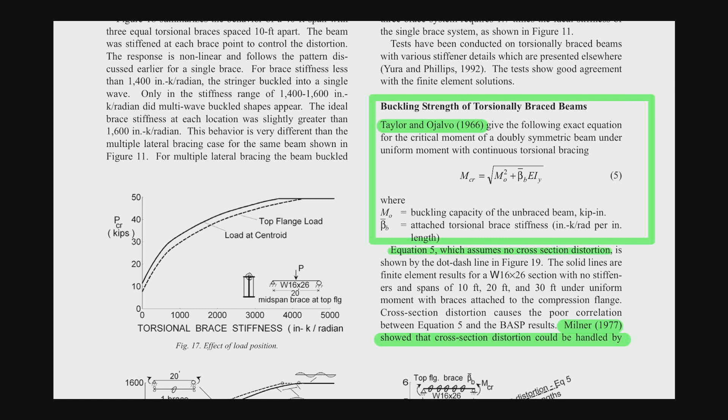So we are going to come back to where we left off yesterday, and we stopped somewhere before the torsional bracing. So the torsional bracing is another part of beam bracing. As the beam fails by stability, it fails by lateral torsional buckling, and that means your brace can be the lateral brace, but you also need the torsional brace to suppress the torsion mode.

The lateral part was already discussed, and we know very well that the lateral brace helps the compression flange such that it mobilizes the full compression force, and that enables the beam to mobilize the full moment as you wish. So the lateral brace is attached to the compression flange. If you put the brace at the wrong point, then it is useless. That's the key requirement for the lateral brace.

Now we are going to talk about the torsional brace. I might look into this information and bring it to you all next year, or if by chance I get to it a little bit later, you might be able to watch it soon. But it's up to the schedule—worst case it'll be next year, and this is the beauty of online teaching.

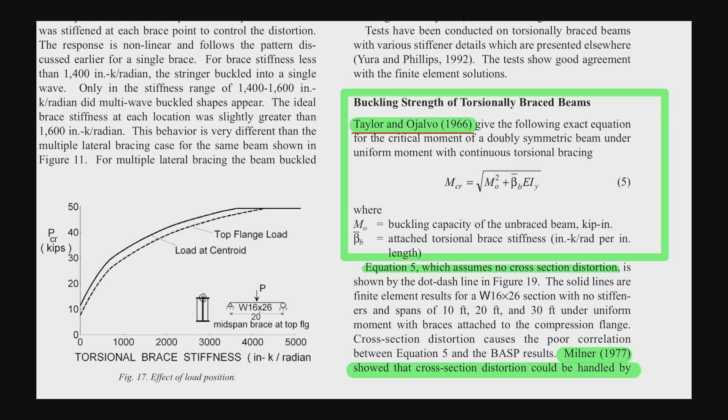So a point like this could be picked up—I think it should be very interesting to pick up. I think you guys signed up for higher education, master's education, because you want to learn. You may not just want to pass the examination. Learning is supposed to be lifelong, and probably you'll have the interest to come back and see why this is usable, why it's good enough. Anyhow...

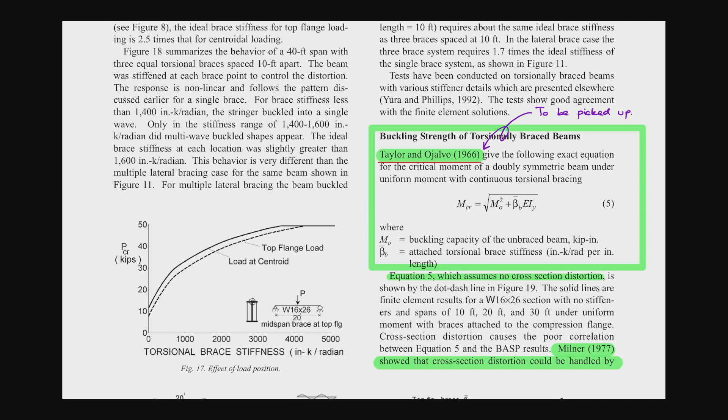The equation of the critical moment that incorporates the brace—this time not the lateral brace but the torsional brace—is given here, and you have M naught, which adds up with this part. M naught comes from the section that is not braced. So you have the section, and from the derivation, you recall that without a brace along the span, and with a uniform moment acting on the beam, you allow the lateral torsional buckling to occur.

So you're going to expect the CB and the other things coming back in later. This part here is enhanced by the term representing the torsional bracing. This torsional brace stiffness comes along with EIY. IY is the lateral bending stiffness of the beam—of the girder—not the major axis, but the minor axis stiffness. So it's the first part, enhanced by the brace part.

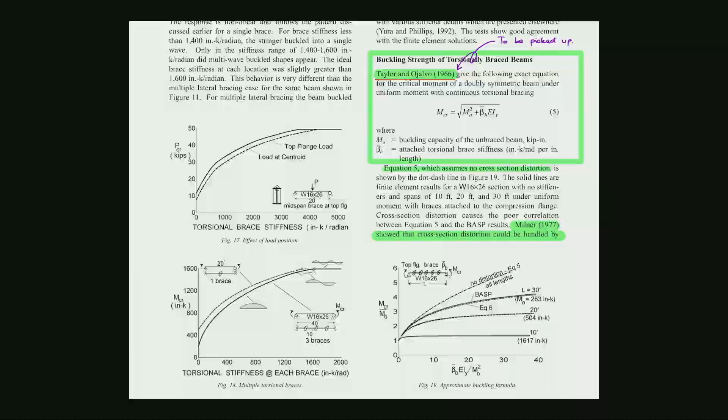And well, the study has been conducted. By the way, this beta B is given by the uniform rotational spring applied along the beam. It is not just going on at a particular point. This is just a simplification, because it is already difficult enough to end up with the M naught that we require. We use the assumption that the moment is uniform, whereas in reality it is not, and then we have the CB factor. Likewise, when you apply the rotational spring, this spring is simplified.

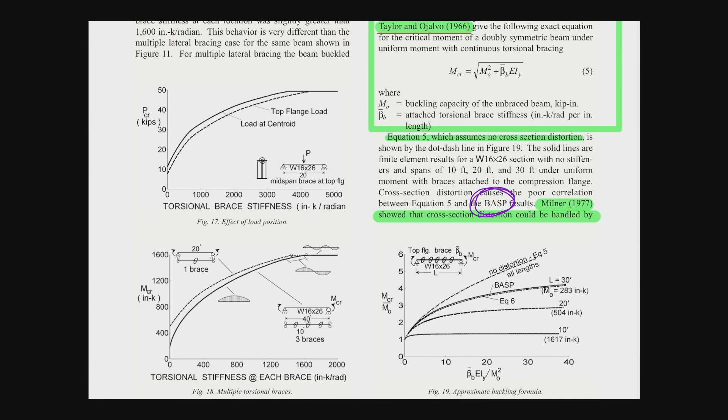It is just distributed along the length of the beam. The analysis by the finite element is given by BASP here. Actually, Yura talks about BASP somewhere - I'm not sure if it's in this paper, but it was supposed to be. He talks about BASP, a finite element software that incorporates the buckling, as the beam is constructed from the shell.

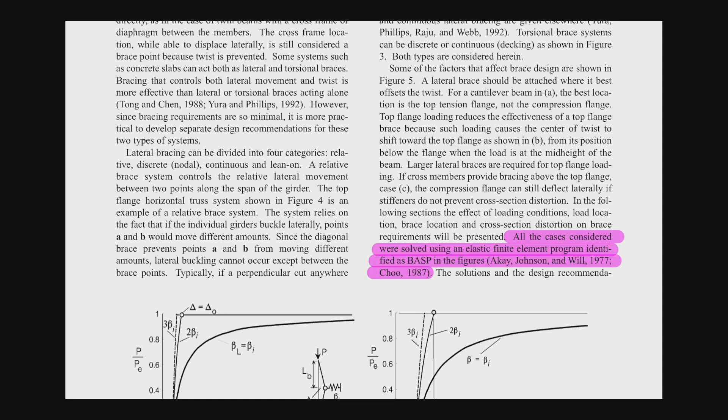All cases considered were solved using an elastic finite element program, identified as BASP in the figures. These should be the group of people who developed the program. The solution and design recommendations presented are consistent with the work of Kirby and Nethercutt. So BASP is the program, but what I want to emphasize is that the buckling analysis was carried out by BASP - that's why you can get this point, this line, these results we have.

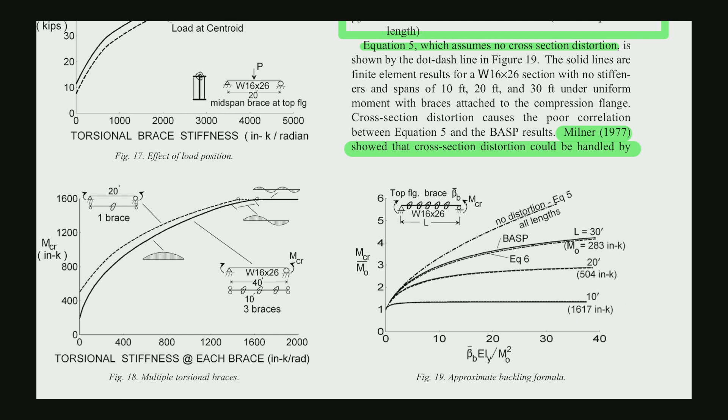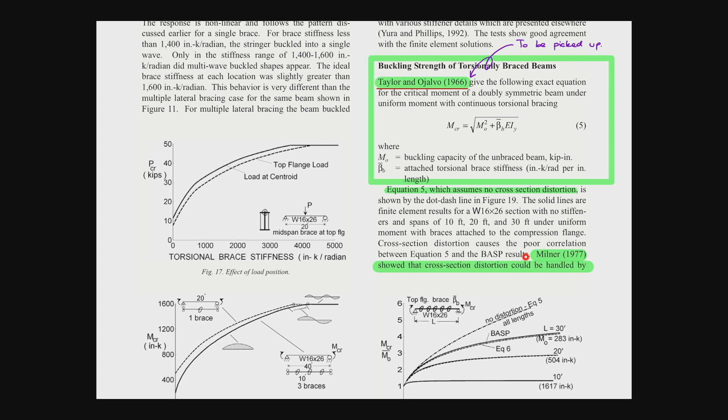So first of all, let's see a bit about the explanation. The dash shown by the dot-dash line in figure 19 is this one. The solid lines are finite element results with no stiffener, at different spans. Under uniform moment with brace attached to the compression flange, cross-section distortion causes poor correlation between BASP and equation number 5.

So over here, BASP - the equation 5 is the equation above - cannot account for the distortion. So what is this cross-sectional distortion?

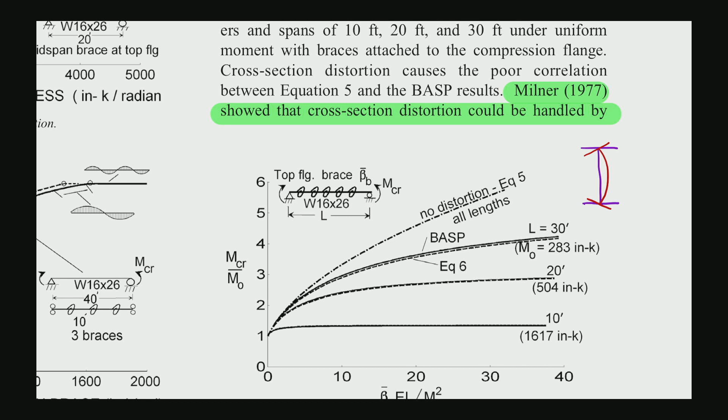Well, the point of this graph is to address the need for a stiffener that prevents distortion. Actually, stiffeners are used on many occasions. First, when the beam buckles from lateral torsional buckling, the beam turns into this red shape - the distorted shape.

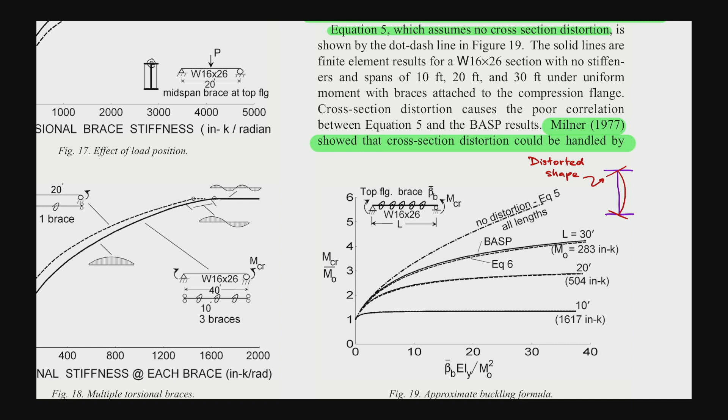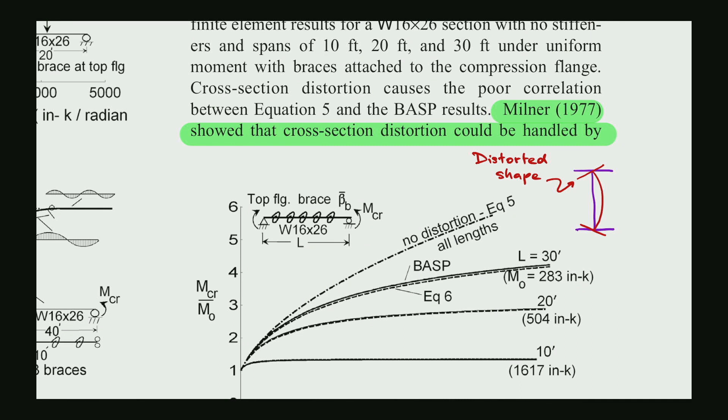So you can expect there will be a twisting force, a twisting moment, that's going to cause the cross section - under the bracing condition - to end up with some distortion. The cross section is deformable, and without the stiffener you end up with this. The equation above simply cannot account for this distortion, because this localized behavior varies along the length. So since the closed form solution doesn't incorporate this fact, equation 5 is greater than the analysis carried out by the finite element software, and that's equation number 6. Equation 6 is going to incorporate the distortion, but without it, this is true for all lengths - it's very far off there, less far here.

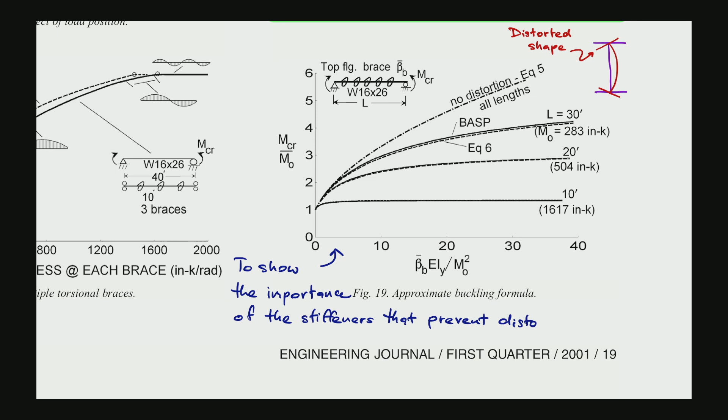Let me just note this down - this is to show the importance of the stiffener that prevents distortion.

So next, the torsional stiffness and the spring stiffness - the brace stiffness used against torsion - is going to be examined. Basically, when we look at the system of the beam, the brace, and the torsional brace, you have many elements like a spring system. Let me explain it this way: it's like a spring system connecting together. For example, you have the brace, the part which is the diaphragm.

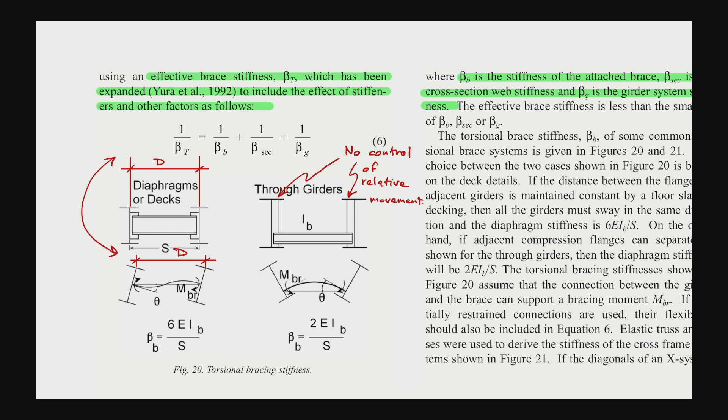Sometimes we call it the diaphragm, and this part has its own stiffness. The girder itself has its own stiffness in bending - the girder can be bent about the axis coming out of plane, so the bend shape is going to look pretty much like this. This part also contributes to the torsional stiffness of the overall system. The cross sections, the brace itself, and the girder effect are all going to be there. So as you have so many springs, these are attached like...

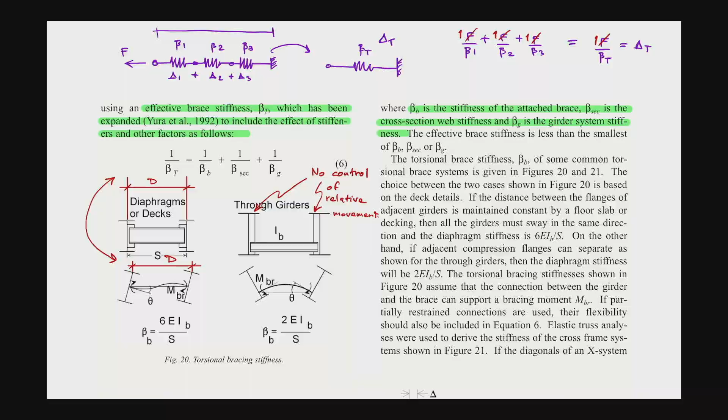So if you have a system like this, and you want to find the equivalent spring stiffness, if the springs are attached in a parallel configuration like this, then you sum them up. But it's different here—it's put in order like this. So you get this total stiffness first, computed from here.

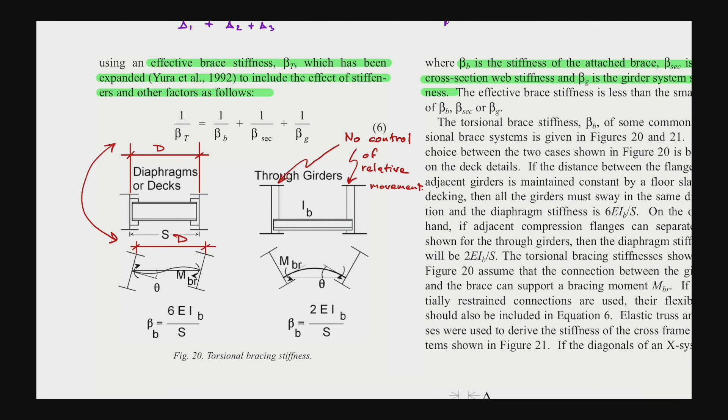So let's talk about beta B, this part here first. This is the brace contribution—the contribution from the brace itself. So the brace stiffness, how is it calculated?

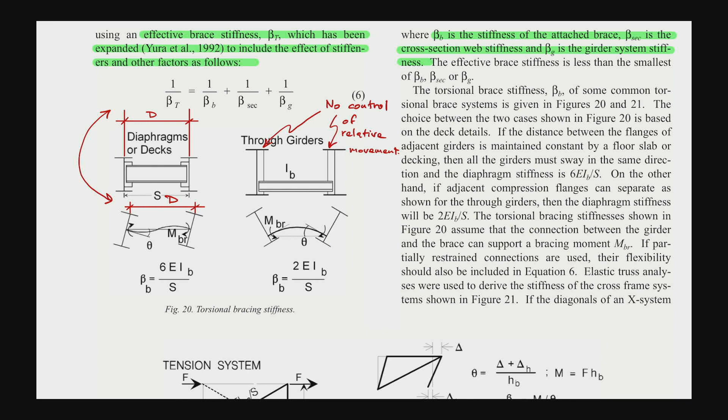As it is the brace against rotation, basically it is the moment divided by the angle of twist, or the theta angle of twist in radians, which is something like this. So you have the moment part and the angle of twist. It's a simple way to find the stiffness, but Yura has prepared sets of formulas for calculating the stiffness of each kind. For example, the first kind, if you are dealing with the girder...

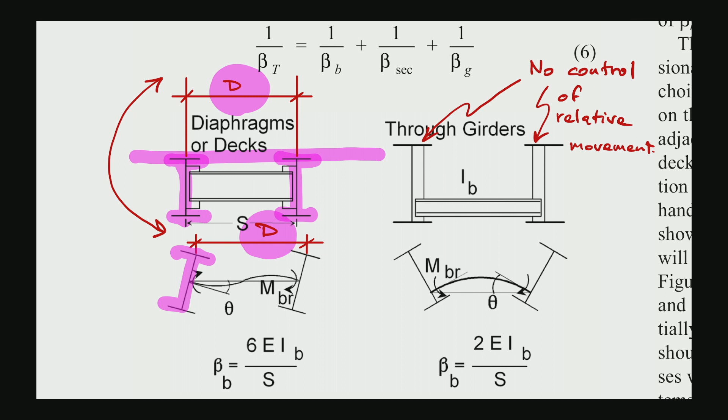These two girders are under the deck—the concrete deck or steel deck or something that connects the top flange of the girders together. At construction, the distance between two girders is D, and when the girder deflects, the distance D is going to be maintained, because the diaphragm connects and locks, preventing the two top flanges from moving away from each other independently. They must move together.

Right, so that's one system, and with that restraining effect from the diaphragm, you end up with this double curvature shape of the brace. This brace is made of just the steel beam, connected by a plate between two webs. Now if the torsional brace is given by the beam as well, but it's a different situation...

This is the through girder situation. So what is this through girder? These are situations you can actually Google, but to make it quick for this course: you might see many bridges made of steel girder, with a platform for the traffic. Generally this is used for rail, the railway system. So the train is going to run on the rail, and this is the platform that carries the load. This is called the through girder system.

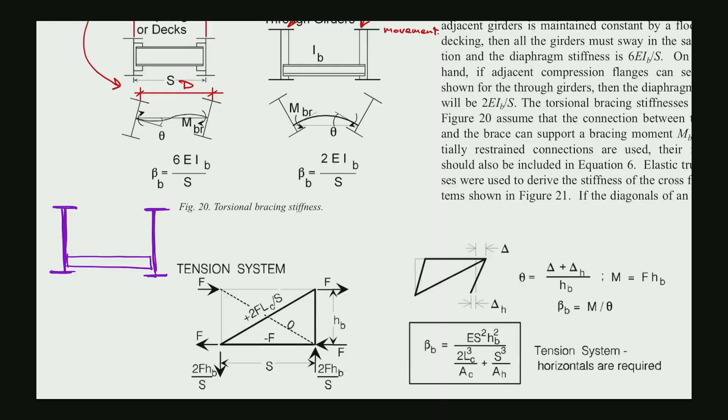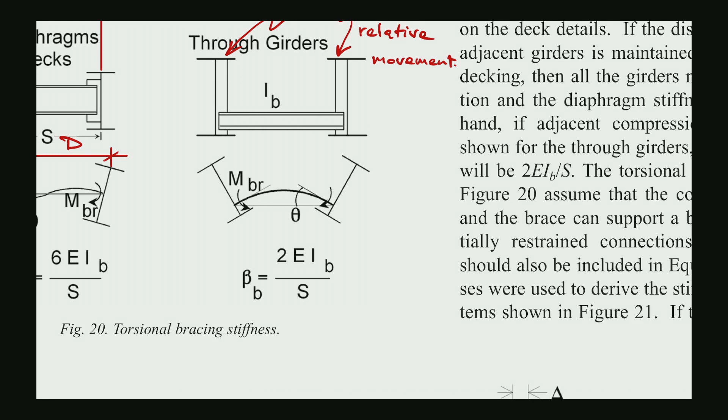It's used like the side barrier. So for this configuration, since you don't have any restraining or displacement control that controls the relative displacement between two top flanges, you end up with this shape. It's going to form only single curvature, and single curvature is easier to form than double curvature, and that makes the stiffness of the brace lower than the other case where double curvature could form. So that makes about 3 times difference in the stiffness.

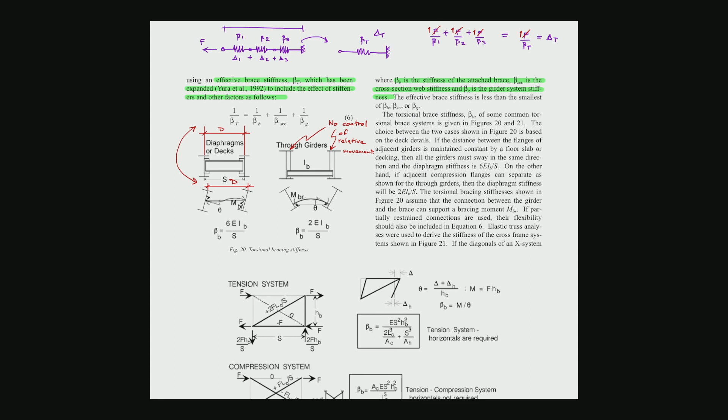This is for some situations. The above is the situation where you have the girder as the rotational or torsional brace, but in many situations you have something called a diaphragm. This diaphragm is somewhere here, and this is your girder - actually it's not going to be that high - and you have the diaphragm.

If you commute around Bangkok area, or whichever area, when you're under the flyover, and if the flyover is a steel structure, a steel bridge, you're gonna see the steel girder, and generally you're gonna see the diaphragm at a few locations like this. So this is a girder, and this is a diaphragm. The diaphragm locks girders together, and that enhances the capacity and the stability, and you can see many shapes of the diaphragm.

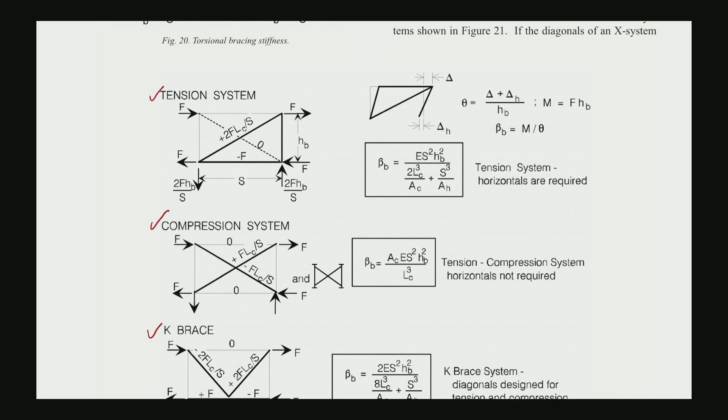So a diaphragm could be the tension system diaphragm, it could be the compression system diaphragm, or the K-brace system. For a tension system, you must have these 3 components - 1, 2, 3. Here is going to be connected to the girder. For a tension system, since the tension element is much stiffer than the compression, the compression element is suspected to buckle.

So we make use of just one in the calculation. In reality, this compression is going to participate, and that will enhance the capacity - it will enhance the stiffness of the torsional brace - but we may not count it in for simplicity. So three members are needed. This one is crucial, it is necessary.

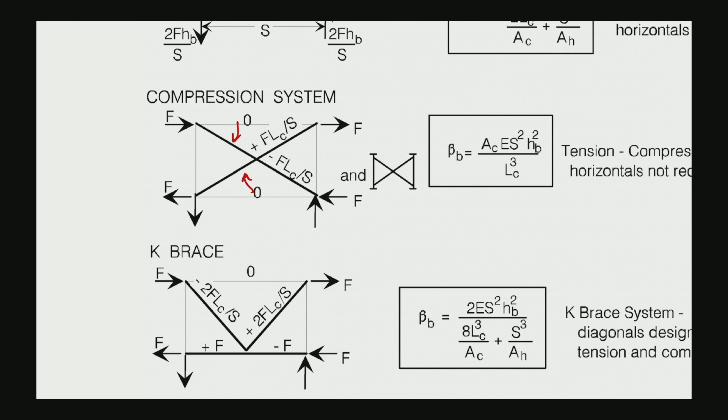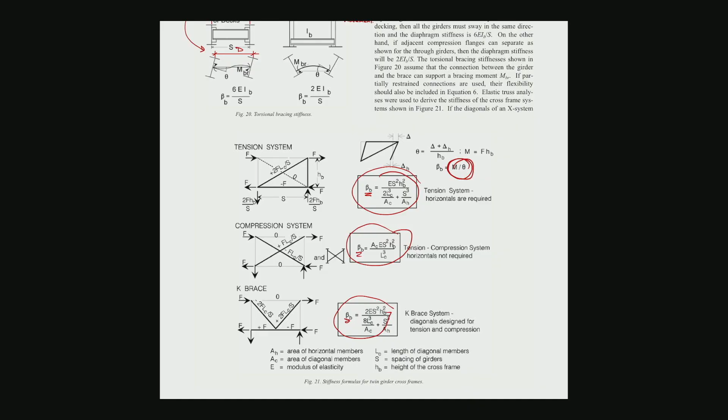Right now we look into this, just the side of the system. You see that beta B is already given. Beta B is the torsional stiffness, rotational stiffness, which is computed from the moment divided by theta. Theta is approximated from here - the lateral displacement that you expect from the calculation, divided by the height of the beam of the girder. This constitutes the angle, the rotation. So you get the moment divided by the angle of rotation, and you get the torsional stiffness of the diaphragm.

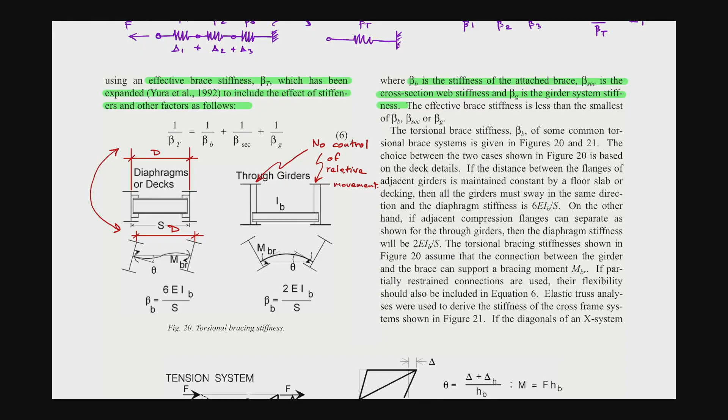Right now we've enlisted 3 parameters with 3 torsional spring stiffnesses. The first one, beta subscript B for the brace, is already covered. Then we have the remaining 2: the deformability of the section that reduces the torsional brace stiffness, and beta G, the girder stiffness, which also participates in the rotational stiffness of the brace.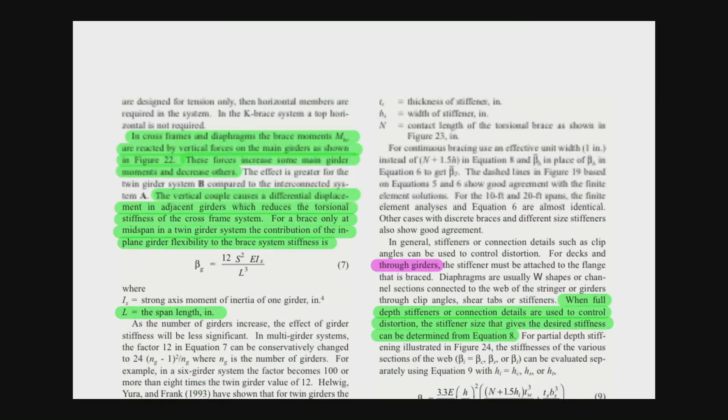Let's see - I'm not sure if I have uploaded this paper or not, but it's not difficult to find. Anyway, I'll put it there if I find that it's not available yet. So this paper talks about the diaphragm, frame, and so on, but I will not read it for you because you can read it back home.

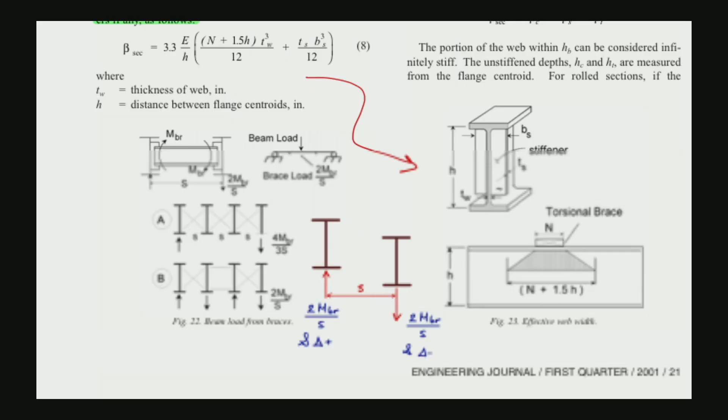The thing is that when you have the two girders connected to each other, and these two brace against the torsion like this, the torsional brace is going to produce the moment, because it restrains your beam against the rotation. So that restraining effect is going to cause the moment - the bracing moment. If you calculate, you will find that there will be something that counteracts with this MBR, the bracing moment.

The MBR will be computed from the beam, computed from the diaphragm. You can compute the MBR quite easily. You get MBR, so total moment is 2 MBR. Now you need to balance, you need to equilibrate the system here, because if you have the moment, you need the counteracting moment, and the counteracting moment is going to be from the resistance of the girder. So this moment is going to cause this pair of force couple - you have 2 MBR, and the force required on the girder itself is going to be 2 MBR divided by S, where S is the spacing between two girders.

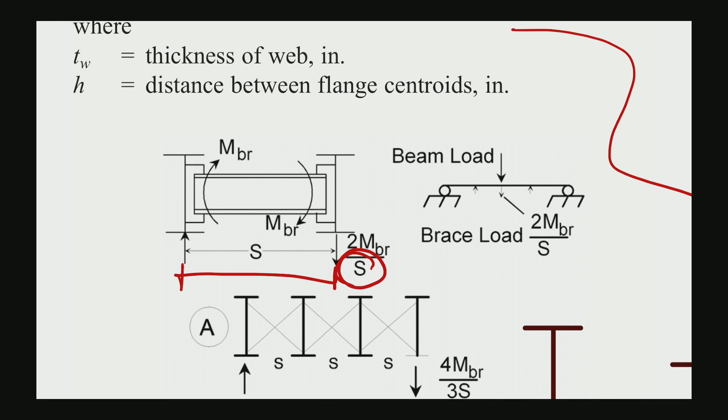The point is that the explanation in the paper here is not so detailed, so I'm going to explain it to you. Here you have the point force acting, which is caused by the brace, the torsional brace - it is 2 MBR over S. Your beam has the stiffness, and that is going to make your beam deform like this. In order to find the deformation here, let's call the deformation delta.

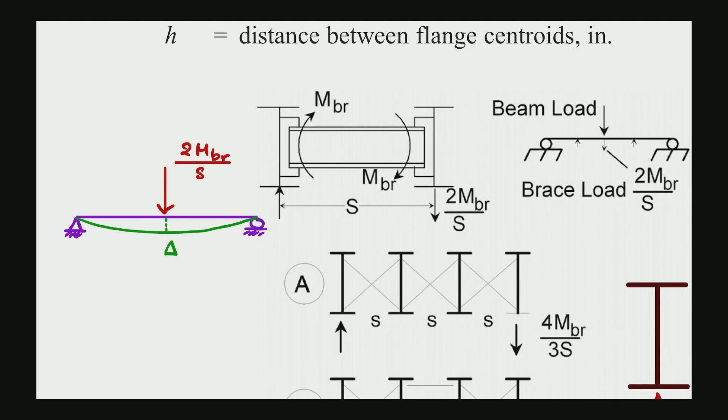If I want to call this one P, just to make it simple first, what is the relationship between this P and the deflection delta? You can just do this on the back of the envelope or just on the scratch pad, right? It is the PL cube over 48 EI, or just Google up.

So the deflection is computed from the force. You have the reactions, and you can get the bending moment diagram. You compute everything accordingly, and then you get the delta equals to PL cube over 48 EI.

Well, the E is simple. We do not need any judgment for the E, because we are talking about steel structure, so it is simple. It is just the E steel. But what about the I? I was supposed to be which I? IX or IY?

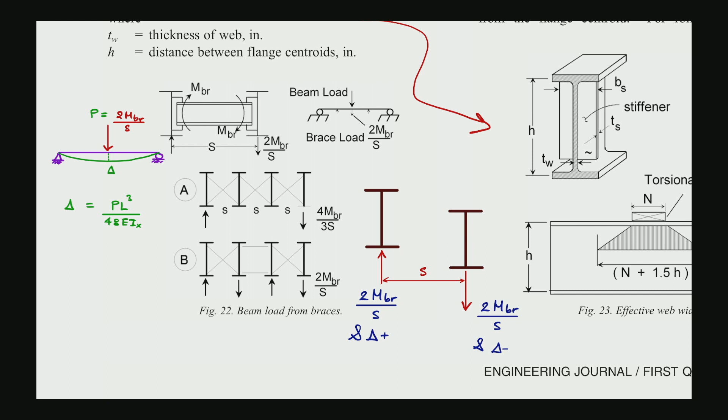This deflection here is controlled by the IX strong axis, right? We are not talking about the lateral, not the horizontal deflection. We are talking about the vertical deflection, and the vertical deflection is controlled by IX. Okay, so just to make sure, because in this course, we deal with lateral deflection and vertical deflections. So you got to stay tuned and make sure that you understand how the mechanism works.

Why the formulation goes this way. All right, so now I have the delta. I will just rewrite the P in terms of delta. So I have the 48 EIX over L cube, and that is multiplied by the delta equals to P. Am I right? Get this move up there, get this move down there. So 48 EI over L cube multiplied by delta equals to P.

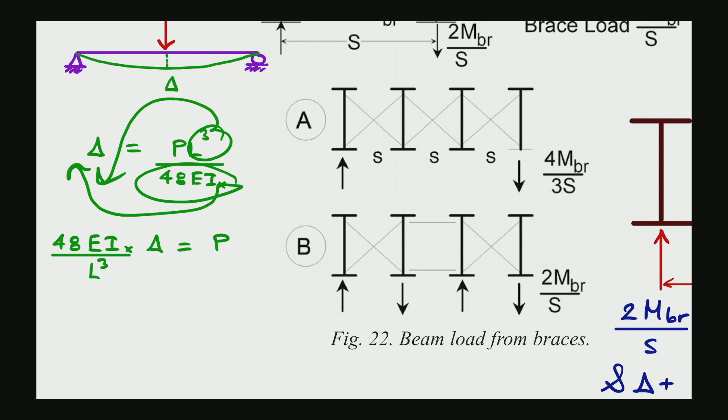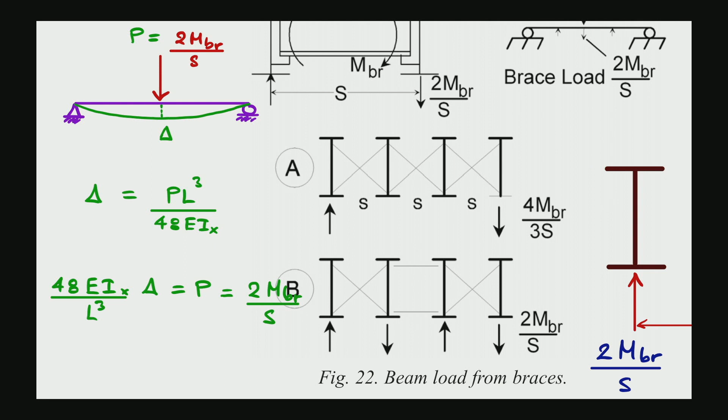The thing is that the P is equals to 2 times of MBR over S. So this is going to be replaced by 2 times, I will say that it is equals to 2 MBR over S, where S is a spacing between two girders.

Now, what next? It is not shown in here, not covered in detail why this formula comes up. Just the explanation that I think it is too difficult many times for people who read. Okay, so I spent some time looking at it, and well, we were gonna see how it ends up at 12 EI S square over L cube.

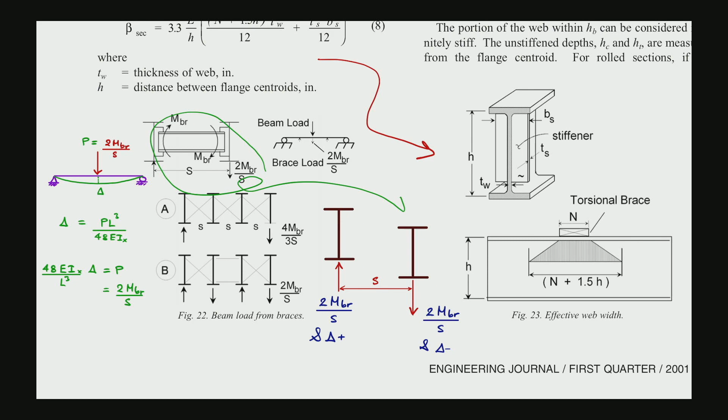Now we come here. This picture, okay, actually it is pretty much like this one, but I redraw it. So the effects from the MBR cause the downward force on one girder and the upward force on another, and that means they are the equal amount of force, as you can see as I wrote it down this way. Same magnitude of force, same magnitude of deflection, but one is the upward deflection and another is the downward deflection.

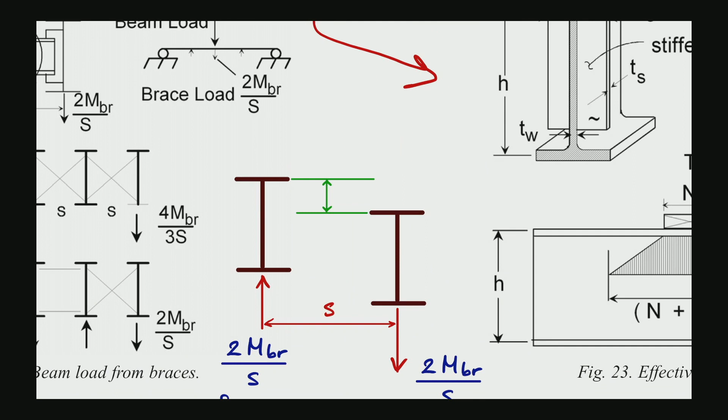So basically, if I want to find the relative deflections between two girders, here is how much? Delta and delta, right? 1 plus 1 minus, so it turns out to be 2 delta. This is the total relative deformation between two.

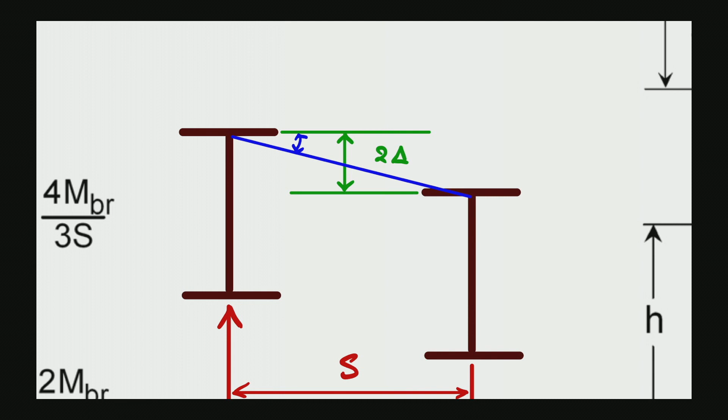Or if you want to get the angle, so the angle could be computed. And this is to be called theta. And theta is computed from, it is a little too small, theta is computed from 2 delta, right, divided by the S.

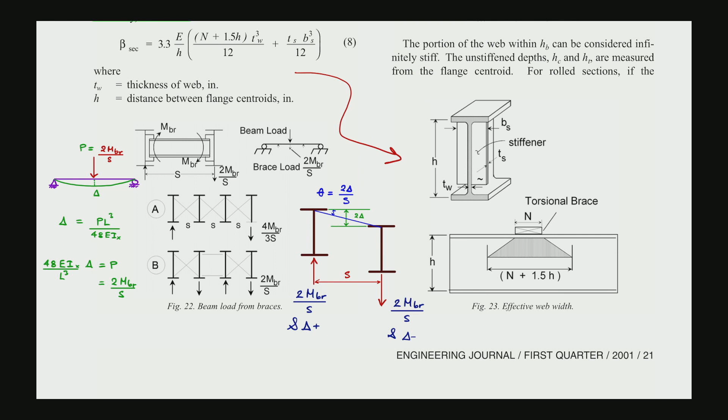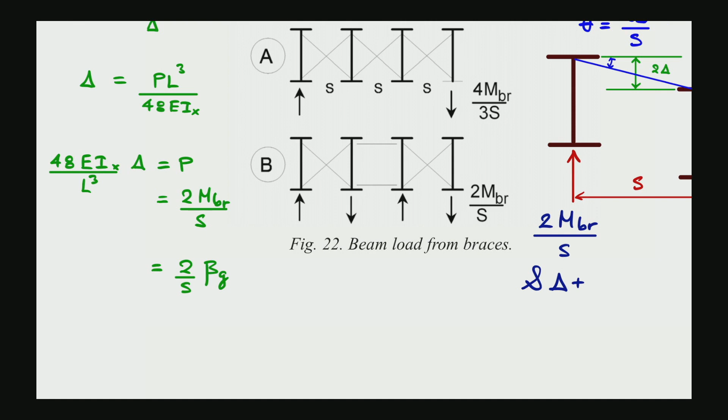Okay, now this angle of distortion is given by theta. Now we come back here. We take the M. We will present the M in terms of the rotational, the torsional stiffness multiplied by the theta. Okay, so we have the 2 over S, which is still there. And then MBR is given by the beta. What is this called? Beta G. Okay, beta G, and this is multiplied by the theta.

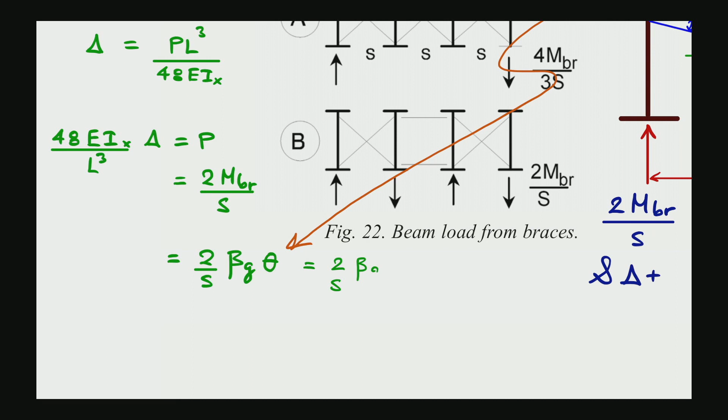And I will just put the guide that the theta is coming from. No, I don't like this one. Okay, from there, actually theta is coming here. Okay, and what is it? 2 over S beta G times theta, and theta, which is 2 times delta over S.

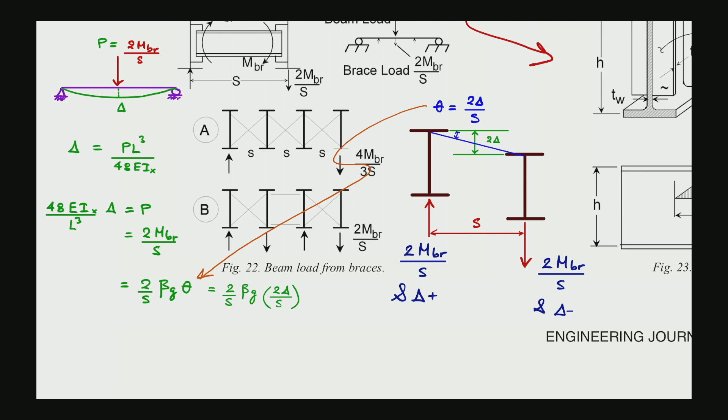Actually, this is quite fun to figure out how the relationship is cast. And then the next step, you have 2 and 2, it turns out to be 4. This is equated to the 48 EIX over L cubed delta.

And then I will rearrange. We want the beta G, right? So we move everything to the other side. Oops, sorry. I will cross something out, like the delta is going to be crossed out with this delta.

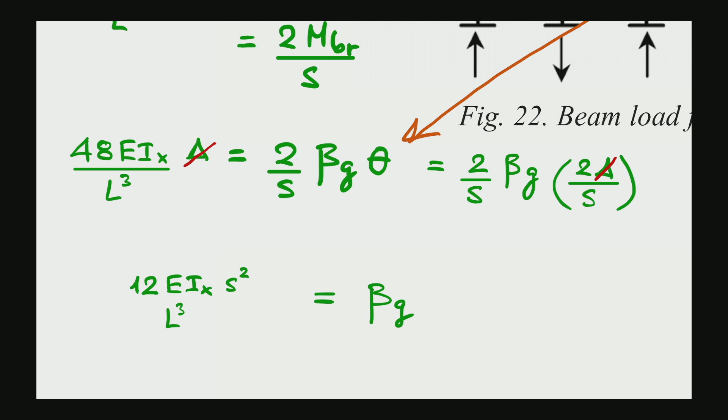That makes the 2 cancel with the 48, and you have only 12 EIX left there over L cube. You have S here and S here. These two denominators will be turning back there on the left side into the numerator. S squared is equal to beta G. Okay, looks like this.

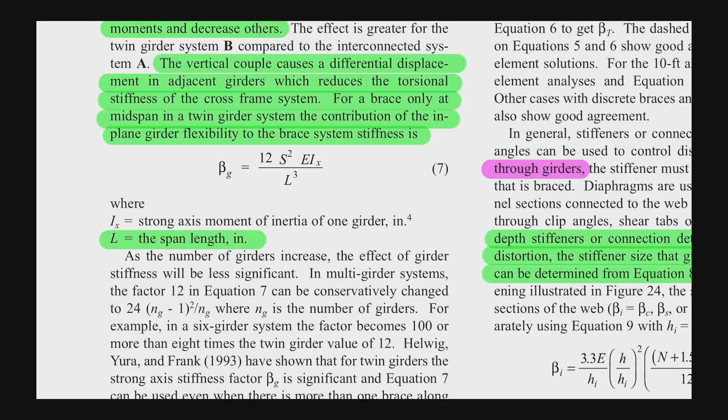This is how the beta G is derived. I put it here. See derivation below.

Okay. So we clear another thing that could be frustrating to us: not being able to figure out what and how this comes from. So it has a reason, but the reason is not explained in detail. That's it. Now it's gonna be more frustrating because I am not going to get down into detail of these things.

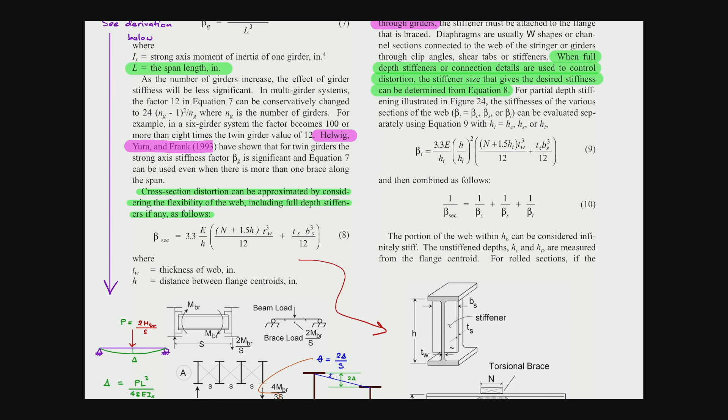But all the gang, Helwig, Yura, and Frank, they are all members at UT Austin. So they have shown for twin girders, the strong axis beta G is significant, and equation number 7 can be used

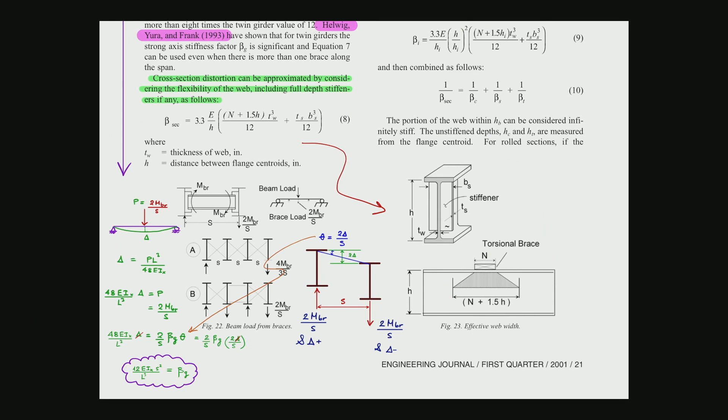even when there is more than one brace along the span. When you have the situation that we derived for the 12 EI S squared over L cube, that is the worst case scenario already. If you look at the case where you have multiple girders like this, all connected together, you will end up with a smaller force, a smaller vertical force acting on the girder, so that produces less effect. It used to be 2, now you have 4/3, which is just 1.333.

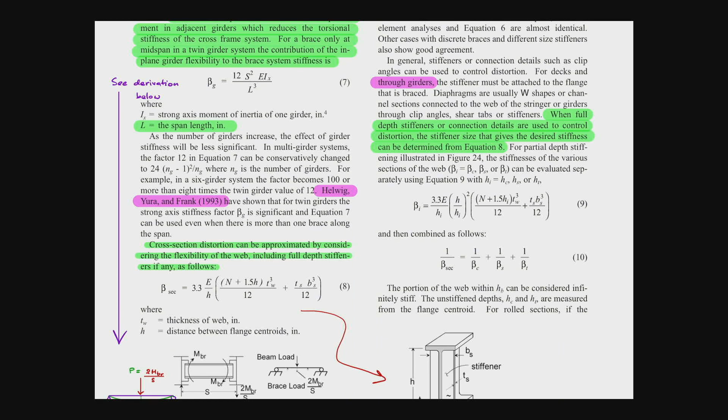Smaller than 2. So this recommendation is going to be conservative, because you will not end up with the case that requires, or the case that the beta G will be -- you will just end up with a smaller force on the girder caused by the brace, the torsional brace.

And then the cross-section distortion. Okay, this is going to be a long story, and if possible, I'm gonna put the explanation. I've looked up for a good explanation of this beta section, but it is about the distortion of the cross-section. So it talks about the parameters from your stiffener, and you can see that the parameters are obtained from the pictures on the right hand side.

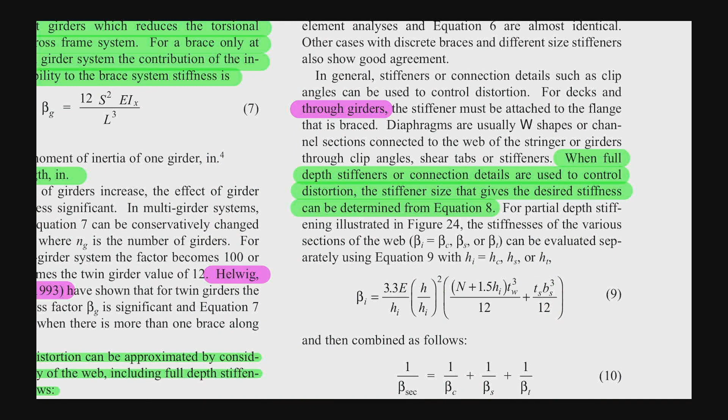Okay, so as the cross section is deformable, your beam cross section is deformable, and when you put the stiffener, it is less deformable, it is stiffer, and that will be computed and used in the calculation of the total torsional stiffness. Okay, when full depth stiffener or connection details are used, this is actually the recommendation for the calculation of the beta section. When you design, you can just opt for the full depth. It is the best.

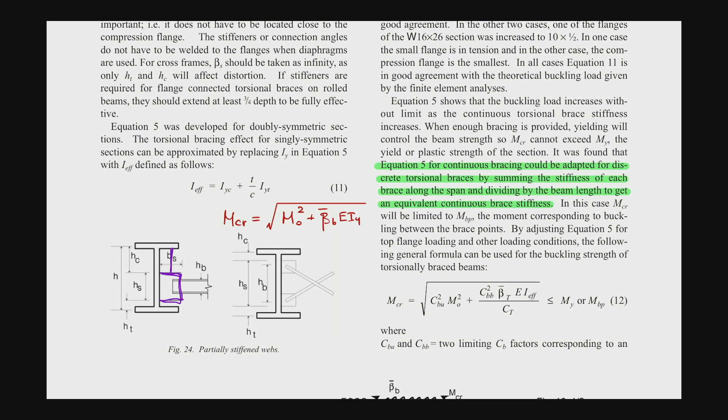But if you cannot go for that, you come to the pictures pretty much like this one. It's not the full depth, it is just partial -- the stiffening effect is going on in just a part or some part, but it's not all the way extending to the top. So the calculation can be obtained, it can be done from equation number 9.

Okay, and then time flies. It is 9:20 already. And we should have enough time to cover the issue about the exam.

So it hooks back to equation number 5. It is just to make it more realistic than the original derivation. So equation number 5 for continuous bracing could be adapted for discrete torsional braces. I emphasized already that it is originally made for the continuous torsional brace, right?

By summing the stiffness of each brace and then you divide. It is as simple as that. So if it is discrete, then take the discrete spring and divide by the length, so you get the rotational spring stiffness over the length.

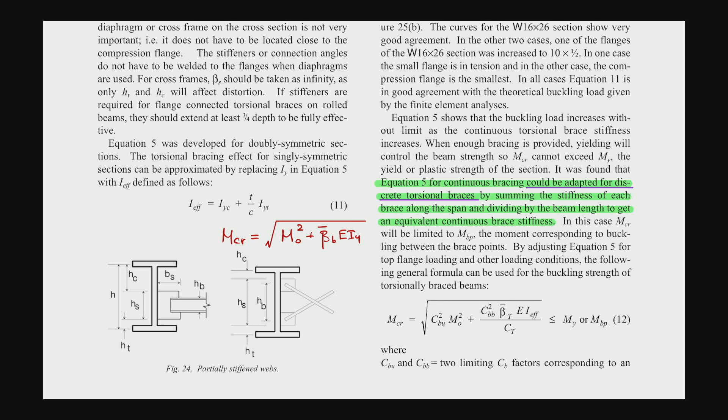By summing the stiffness of each brace along the span and dividing by the beam length, you get an equivalent continuous brace, okay, etc., etc. And this equation is modified, so the M naught turns out to be the CB, okay, it just came in place, and it adjusts the capacity.

And this part on the back here, you can see that you have the BT. BT stands for the total torsional brace stiffness. So it is the sum: 1 over BT equals 1 over B section, 1 over B girder, 1 over B brace, EI over CT.

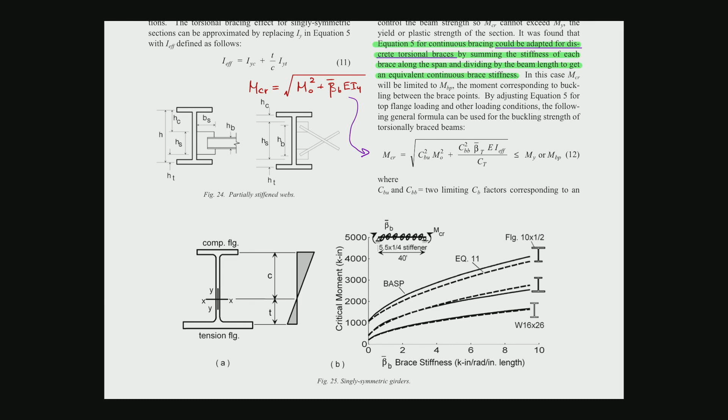I may not cover this part. This is about the cross section that is just singly symmetric. The bottom one is the doubly symmetrical cross section. We rarely bump into this situation, it is just a detail issue.

Top flange load, no stiffener, fine. We come to this point here. So, torsional brace design.

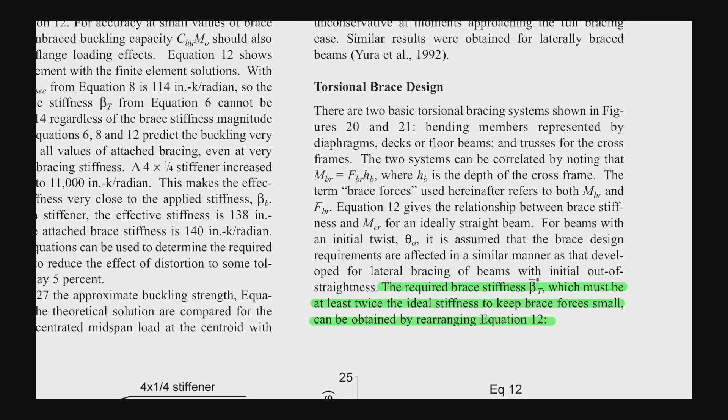It is just coming from the equation here. So the torsional brace design comes from this point: the required brace stiffness must be at least twice the ideal stiffness. This is identical to the design of the lateral bracing, like the column, like the lateral bracing of the compression flange of the beam, which is the same thing. We are in the same situation as the torsional brace, which is going on in the beam.

To keep the brace force small, we need twice the ideal stiffness. This can be obtained by rearranging equation 12, and finally you end up with this. So basically you start from this equation, you square everything up, the square root is gone, you need this thing, so this goes back to that side as the minus sign going there.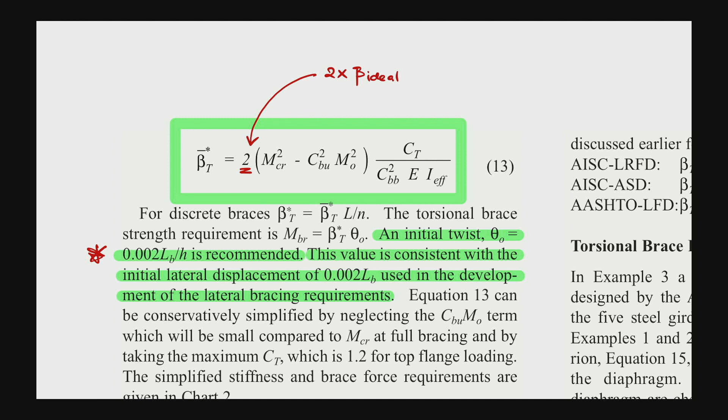And furthermore, the bracing force and bracing moment is obtained from the initial imperfection. So the way the initial imperfection is set up is affecting the bracing force, right? And as set up here, the initial twist is given by 0.002, which is 1 over 500 L. This is consistent with the number you used to see in the previous derivations.

0.002 Lb over h. So you need to change from just the out-of-straightness to the rotation, or the twisting, the initial twisting. So divide by h, which is the depth of the cross section, and that makes it the rotation or twisting. It's recommended this value is consistent with the initial lateral displacement used in the development of the lateral bracing requirement. So it just shows that everything is consistent.

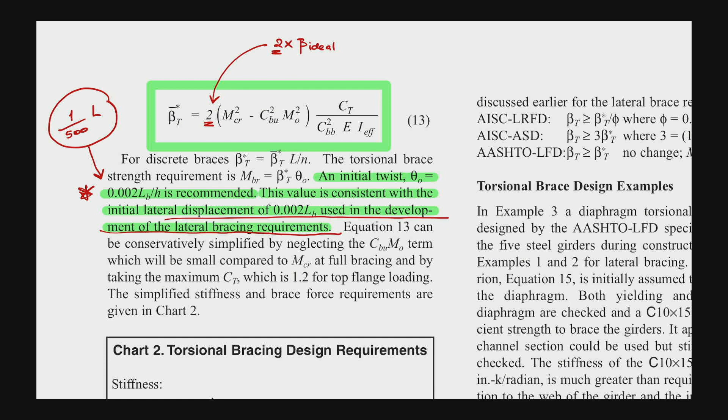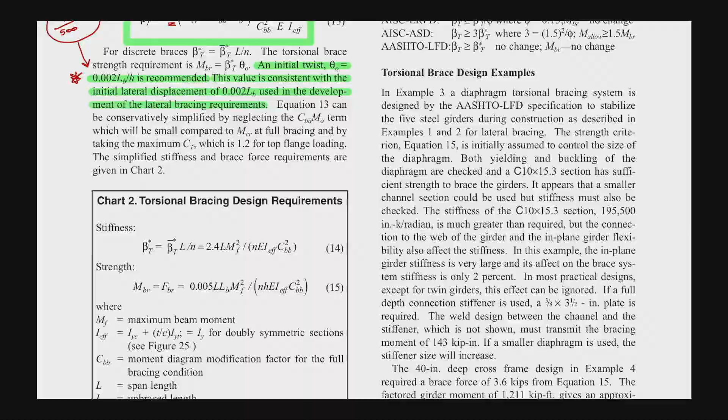Now we are in the torsional bracing design, and the equations are obtained from the part there at the top. So what to be, number of intermediate braces along the span, is given. EI, CB, we saw all this already.

First thing, but I should highlight it there, such that equation 13 can be simplified conservatively. Of course, the bigger the brace stiffness, the better, right?

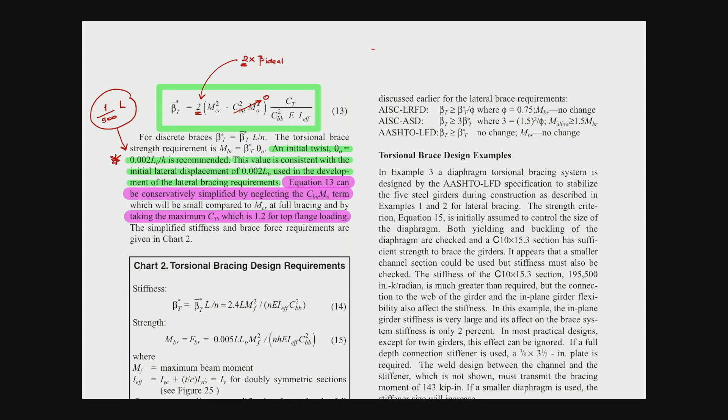By neglecting the term, and taking the maximum CT, which is 1.2 for top flange loading, this is the worst case scenario. For top flange loading, it is conservative design.

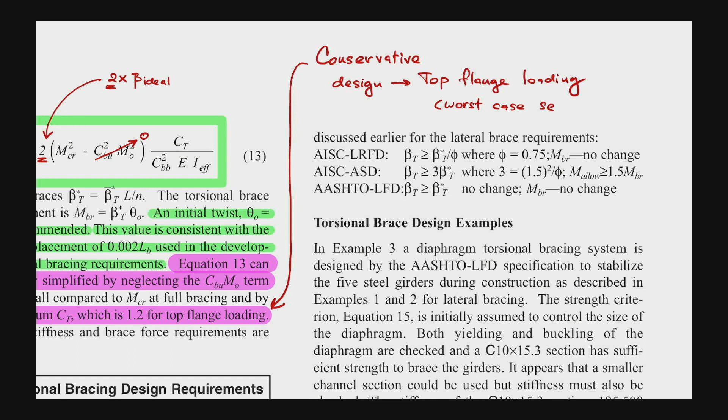Top flange loading, which is the worst — bad handwriting here — worst case scenario.

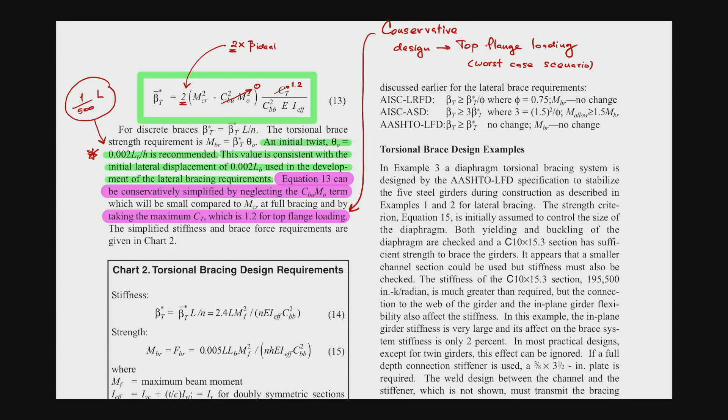So plug in the CT being 1.2, and CB is there. So that's why from equation 13 you can come down to here, to multiply by 1.2.

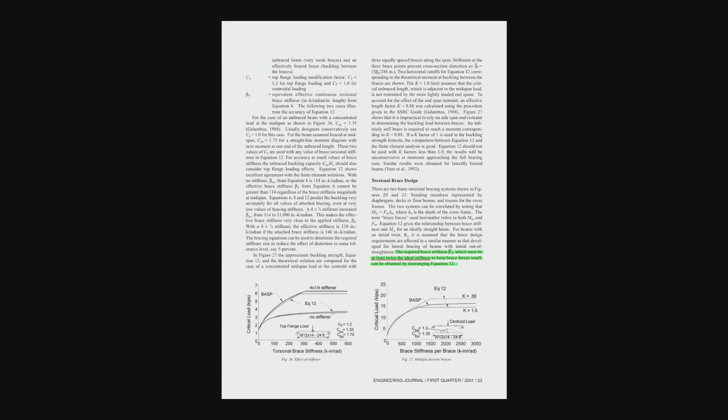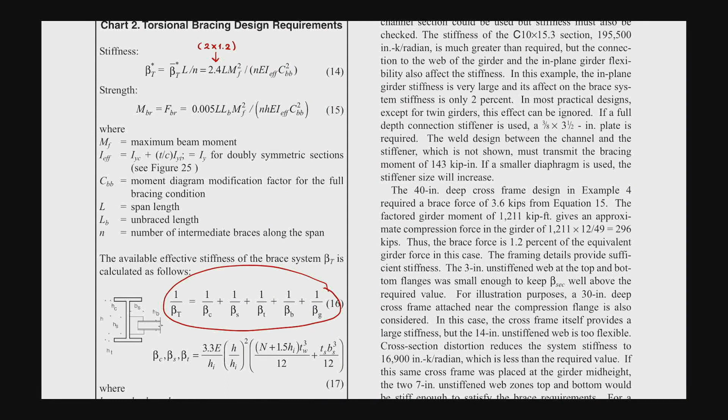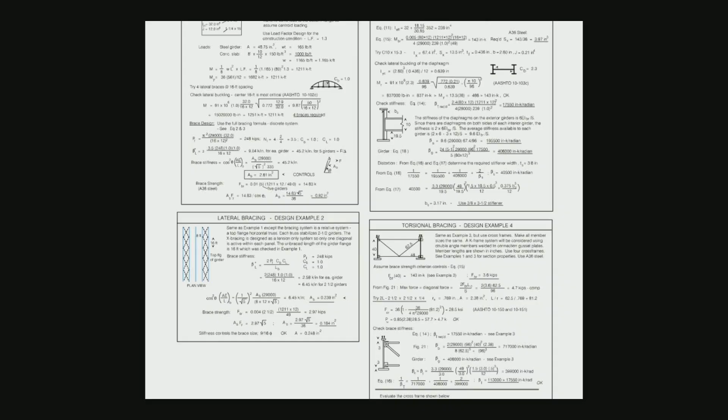And the rest is the torsional brace design example by AASHTO. I'm not going to ask you to design any brace or anything like this example. This is just the cookbook, so if you want to cook something, you follow the steps recommended in AISC. This is not the course where we learn the design, we learn the behavior of the structure, and I just wish that you understand how everything behaves. And once you understand this, in the design it will be automatically improved.

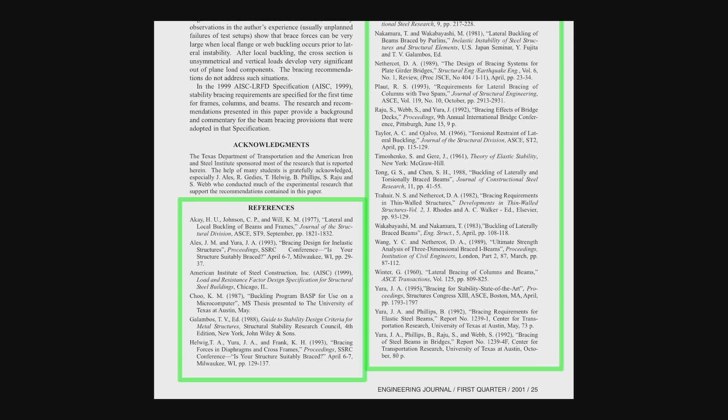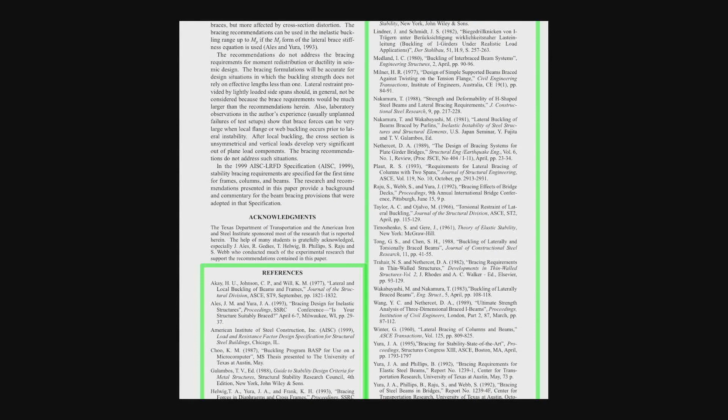This is a list of papers used to constitute this given paper that we are reading. It's gonna be quite interesting, probably next year, to look into the detail of these sets of papers. Maybe detailed explanation might be given in other papers, but the author doesn't want to spend too much time and pages in this paper explaining things, so it might be found elsewhere. But it's going to be fun to understand every single detail about how the formulas in the AISC are proposed, on what basis, what is the understanding behind each formula - that is very important.

Most of the time, seriously, in ACI and AISC, I have seen a lot of my students just picking up the formula without understanding it and then just plugging in the variables. Most of the time it is done incorrectly because you are trying to treat the code of practice like a cookbook. If you don't read, or don't try to understand how come each individual formula is written this way, there is a very high chance you pick up the values in the wrong way.

Believe me, a formula like this is very sensitive. You put something wrong in there, your design might be super dangerous. Or you feel like this is not good, so you try to make it super conservative, putting the numbers in a conservative manner for all parameters.